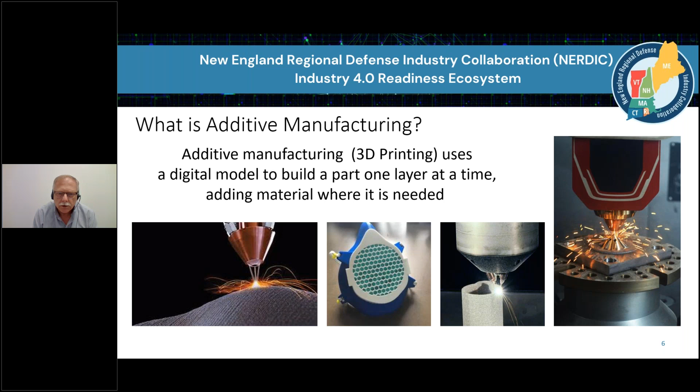Next slide, please. So what are the benefits of that versus other traditional methods? It has the potential to make things better, faster, cheaper, lighter than some of the conventional technologies. Early adopters in the aerospace industry are reporting as much as a 90% reduction in material cost. They're not creating the scrap and waste that they do in some of the traditional processes as far as metals go. With the new tools available for topology optimization and generative design, it's being used to lightweight parts. So in aerospace, electric automotive and many different industries, that's an important feature.

It's great for part consolidation. Instead of multiple parts conventionally, where we're limited on how they can be made, using additive technology we're making parts as a single piece now. The fuel nozzle from GE's LEAP engine is a great example. It was 20 plus parts originally the way it was designed and manufactured. They're building it now additively as a single part.

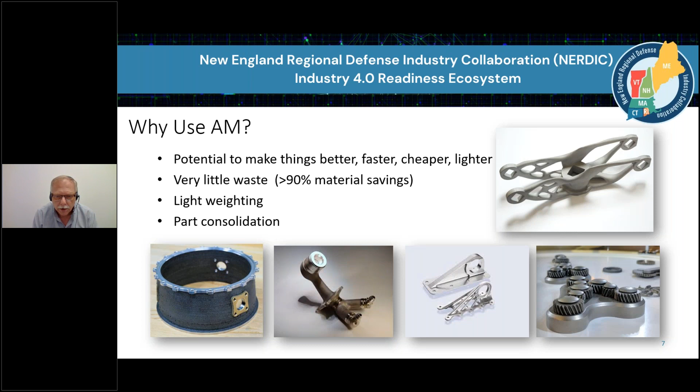Next slide, please. So why use AM? Once again, it can be a tool to create things that are difficult or even impossible to do with other technologies. So if we look on the left, the heat exchanger, you have a helix inside a tube.

This would be impossible to build as a single piece anyway using conventional tools. You can design for end use versus manufacture. So when you design something, hopefully it's designed to be manufactured, and there's limitations on how you can hold it, how you can build it, what you can do inside the mold, et cetera. Using additive technologies helps to free up some of the design constraints that were traditionally met. So the concept of free complexity.

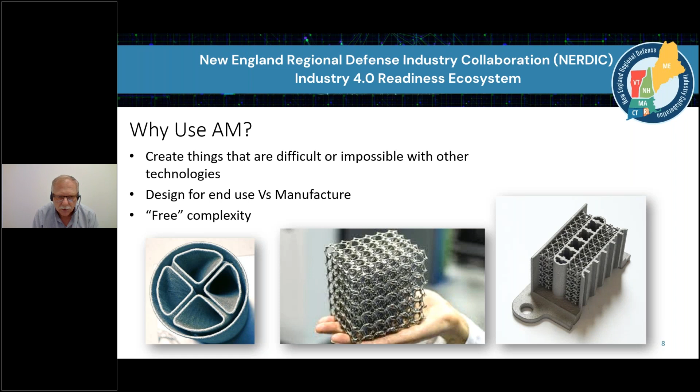So when we look at the matrix in the middle, this is a great example where this would be impossible to build using conventional technologies, but it's really no more hard to build using additive technology than building a solid cube. Next, please. So typically, there's no tooling or fixturing involved. So when you're looking at the low to mid volume production range, if you don't have to have molds or dies made, this can be a tremendous savings. So when we look at the electrical connector on the right, that's made using additive technology, and it has as good characteristics as something that's traditionally injection molded.

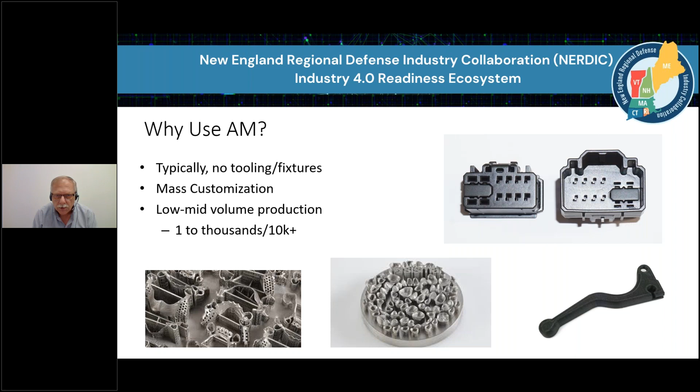The idea of mass customization. So if we look at the tooth inserts in the middle photograph, each one of these is built for a specific patient, and they're all built simultaneously on the same build plate. So the idea of making multiple parts simultaneously, each one different from the others. And once again, it's ideal for low to mid volume production, which could mean one-off, or it could mean thousands or even tens of thousands of a part.

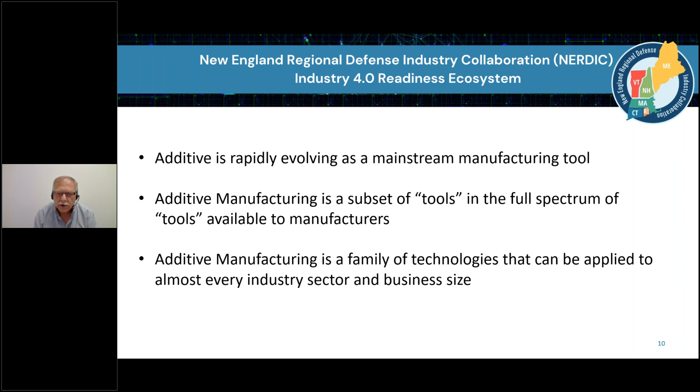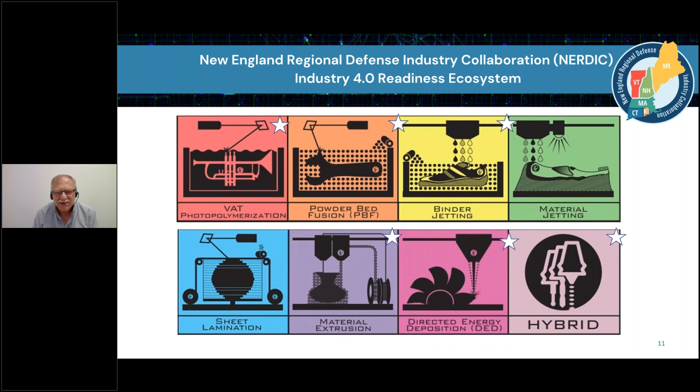So when we look at some of the keys in the additive industry, it is rapidly evolving as a mainstream manufacturing tool. It's a subset of all of the tools that are available to manufacturers today. And additive is not just a single technology or a single piece of equipment, but a family of technologies, and they truly can be and are being applied to almost every industry sector and every business size. The ASTM F42 committee has defined 7 different technology families that comprise additive, plus hybrid. So there's a lot of different technologies available, a lot of different kinds of tools in the tool set. Depending on what you want to do, one or more of these tools may be more appropriate than others. That's outside of the conversation of this presentation.

When you look at the types of materials, basically anything that's made using conventional technologies can more than likely be made using additive technology. So a full range of plastics and polymers, full range of metals, composite materials, ceramics, and even sand, so the digital printing of molds and cores for the casting industry. And key is that new materials are rapidly being developed specifically for the additive process, and in fact, they're being customized for it. So it's getting to the point where you can tell a company that you need a part that has to meet these specifications, and if there's not an existing material, it's possible to custom design a material for that application.

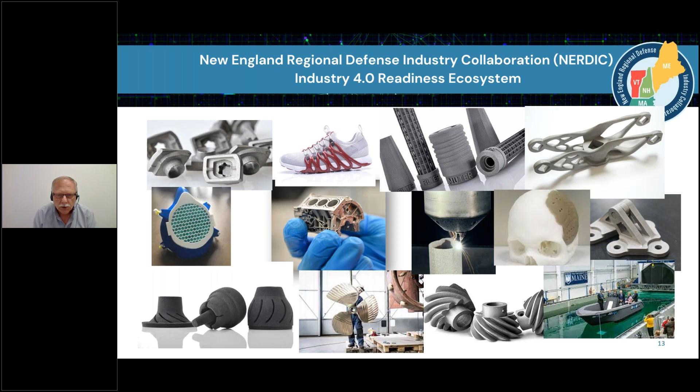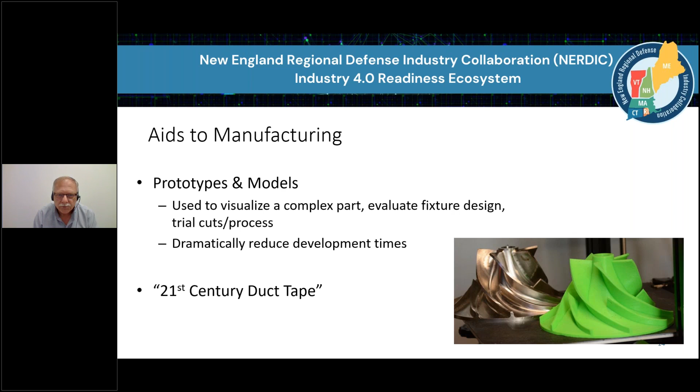So additive is being used in a multitude of industries for producing new parts. This is a wide range of some of the things that are possible. Next slide, please. But what we see as low-hanging fruit, or something that is very commonly used for additive today, is aids to manufacturing. Originally, additive manufacturing was a tremendous tool for prototyping, so it continues to speed up the design process. People are using it to produce models so that they can visualize a complex part, what they need to do to fixture it conventionally, or they can even begin making test cuts and developing their process while they're waiting, as an example, for a casting to come in. And people affectionately are starting to refer to it as 21st century duct tape. There's not much that you can't do with it.

As we continue to talk about aids to manufacturing, the idea of fixtures, jigs, guides, customized tool carriers, customized parts trays for assembly, just a wide range of applications. Once again, with all of the materials that are available, if you can conceive it and you can build it conventionally, then here again, additive might be a great tool. It's freeing up a means for creating fixtures. It's reducing the cost of building those fixtures. It's reducing the time required to build them.

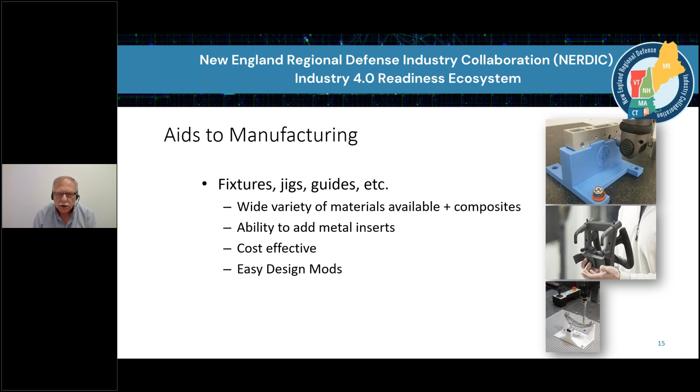And so it's really revolutionizing the use and availability of fixtures. Right, next, please. So the takeaways in quick summary: additive is here to stay.

It's not a flavor of the month. It's a very real manufacturing tool that's moving rapidly into the manufacturing mainstream. It's evolving and it's being adopted at a much faster rate than many companies realize. So if you're not using additive today, it would be an interesting experience for you to realize your competitors and other industries are adopting it and making use of it.

The materials are evolving, and as the materials are evolving, so are the design and the modeling tools. So it truly is enabling and allowing people to build new parts in new ways. Here again, to repeat, it is rapidly becoming a mainstream manufacturing tool. It can work synergistically with traditional technology.

So once again, the idea of additive and traditional subtractive machining, working on a lathe, cutting, grinding, are all technologies that work hand in hand with each other. And it won't completely replace traditional manufacturing tools, but it is going to be highly disruptive. There are a lot of companies that have already adopted it, and a lot of OEMs are investing heavily in it.

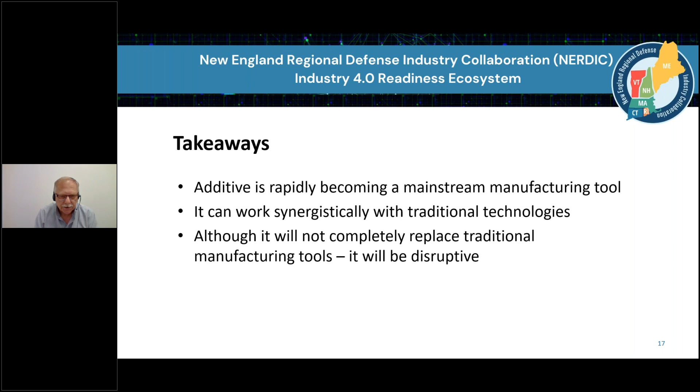Thanks, Jeff. So now we're going to get into some of the case studies. We did two case studies. The first one was with Concepts NREC. And I'm going to invite my colleague, Sam Greenbank, to come on and talk about the actual building process.

Hello. So just to go over this part and what we did with it. We were given a part and tasked with validating how manufacturable the part is using additive technologies, to look at how easy it is to make, can it be made, what kind of things there are to watch out for, how well it meets tolerance, etc. The part is fairly complex. It has internal channels that could not be conventionally manufactured.

We used a Renishaw AM400 powder bed fusion machine to build the part, and we used 316L stainless steel powder for the build. Namely, that's what we have on hand, and it's a good material to work with for validation before using more expensive end-use materials. Total print time was about 36 hours.

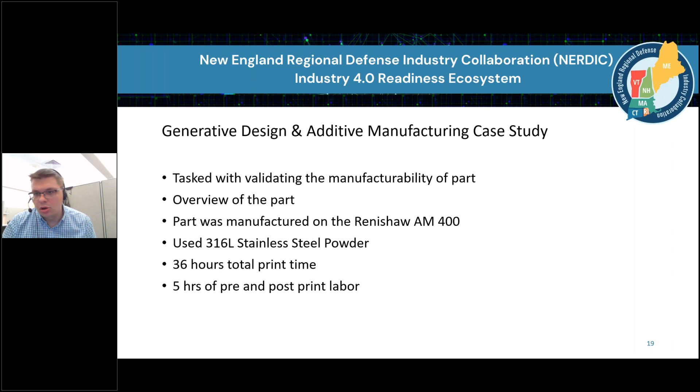So to go over the initial issues that we saw, the part geometry itself posed several challenges. The part had a fairly large area of overhang that would not be in direct contact with the build plate, at a very shallow angle that's prone to lifting and peeling without adequate supports and tie downs.

Several of the internal cavities also had a flat roof, for lack of a better term, that would typically need support material. However, being an internal cavity, supports would not be removable. So that was an area of concern, and part of the reason that we wanted to validate this part first before going much further with it.

As for the strategies I used to print this part, I printed two parts side by side. The first one used traditional pillared support material, basically a bunch of posts on the bottom surface of the part, tying it down to the build plate. My concern was that this would rip free of the supports, and the surface finish of the bottom surface would not be adequate, and there wouldn't be enough material left to post machine.

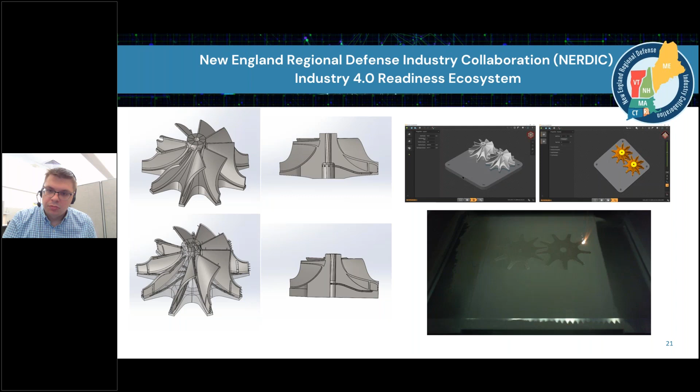On the right-hand side of the screen, we have the setup in the Renishaw software to build the part. First one is the layout with the supports, and then the other one is the toolpath validation. And finally, the bottom picture on the right side is a shot of the machine running to kind of see how the parts were nested together in the powder build. Go to the next, please.

So this is the finished part coming out. Surface finish, and the fact that it completed without any real issues was a bit more than what I personally expected from the part. I expected to have more difficulties than we did have. The build plate did warp significantly and required quite a bit of work to get it out of the machine.

The other issue that we had is the cooling holes that you can see in the center picture. Those are about 0.5 millimeter in diameter on the model. Some of those towards the end collapsed a little bit in size. And so to clean those out, we used a microblaster to open up the holes slightly, which removed any collapsed material from in there, and then that allowed us to remove the powder from inside the blades by using the same microblaster without the blast media to blow air through the cavities to flush the powder out those holes.

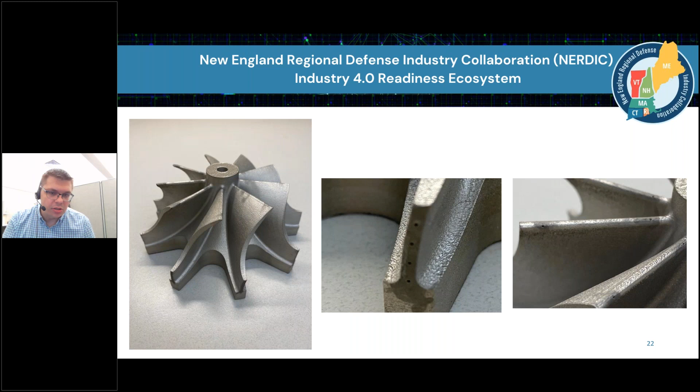And you can also see on the right side the two small holes also on the top of the blades. Again, something that would be quite difficult to manufacture by traditional means. Next slide. So, this is an inspection. I'll turn it back over to Nasir to go over the inspection and the results.

Thanks, Sam. So at this point, we're going to get into the post analysis. We took some scans of the parts so that we can get some dimensional information. What was the distortion as compared to the original CAD design? And then also some CT scans as well, and X-ray images.

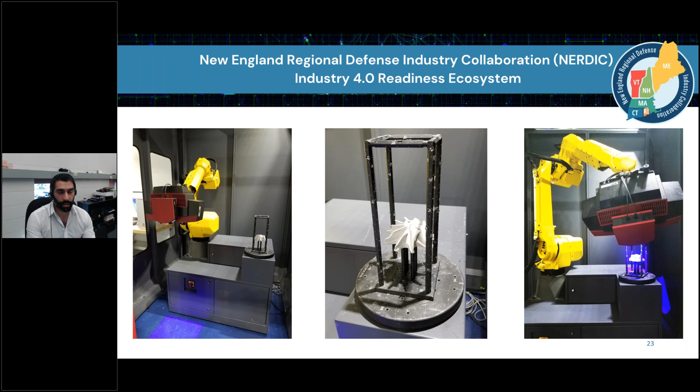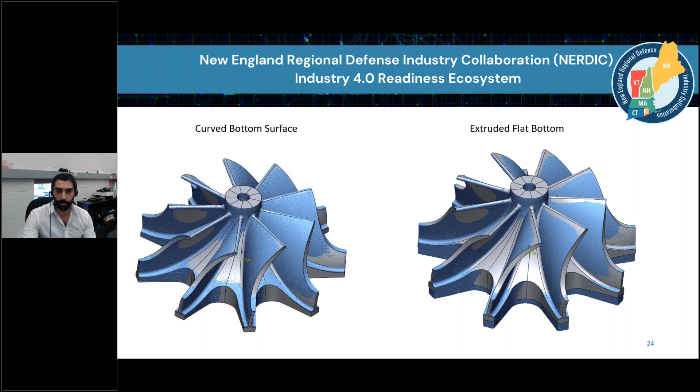So I'm going to intermittently bring on my colleagues to comment, but I'll just go through. I'm going to turn off my video so that it gives you a little bit more real estate to view the slides. Some of the text on there came out a little small, so I'm going to go ahead and turn that off.

Basically, what you saw on the previous slide was the setup on the GOM structured light scanning system. You see on the left there, that red component on the robot is the actual sensor. It uses a structured light pattern to scan the part. With this kind of non-contact inspection system, in the image in the center you see the part is just placed on a few standoffs, within a cage that has a bunch of dots on it, and those dots are called photogrammetry dots. They're used by the scanning system to track the location of that part as it's being moved around, and as the robot is moving the sensor around the part for the alignment of the individual scans.

And so the picture on the right, you see it in action. There's a blue light projected on to the surface of the part. A structured light pattern is projected on, and it deforms as it hits the surface, and cameras take images of that deformed pattern to reconstruct the surface. Next slide, please.

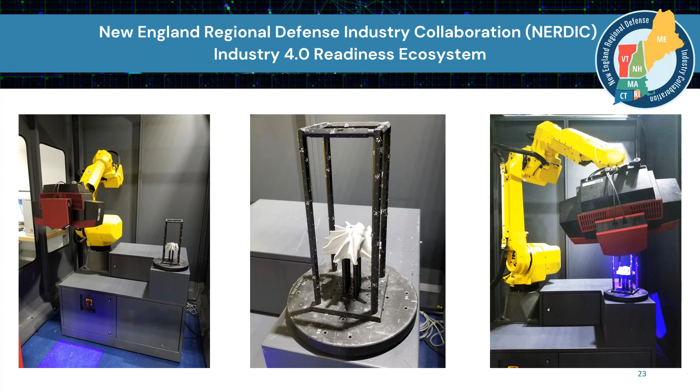Next slide, please. So some quick visuals. If we zoom in on some areas at the top there, that top cylinder feature, you can see that the scan data is below the surface. So we're going to expect to see a negative deviation there.

And on the picture at the bottom left and the bottom right, you can see the respective tips of the impeller blades. You can see the picture on the left where it did not have an extruded flat bottom. Sam mentioned earlier, there was a little bit of warpage of the part right at the tip, and it warped upwards, which pulled the surface that the four cooling holes are on the tip away. So we should see a negative deviation at the bottom, and also a negative deviation on the tips.

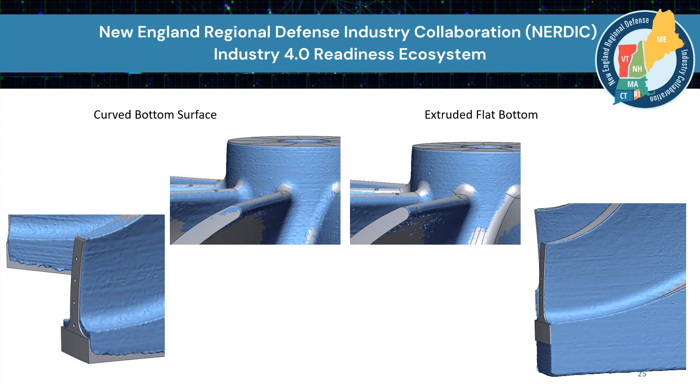So here, what we're looking at, these two images represent a coloration of the difference between the surface of the CAD model and the actual scanned part. The red indicates where the physical part has too much material, and as you get down into the blue, we get into areas of where the actual surface of the part is below the CAD surface.

So what you can see in the image on the left is pretty consistently, we're seeing that the impeller blades have on the suction side a positive deviation. In other words, there's too much material. And then you can see on the left blades, kind of on the bottom surface on the pressure side, there is a negative deviation. So what that's indicating is that the actual surface is more curved than the design in the CAD file.

Similarly, you can see on the deviation map on the left there for the curved bottom surface part, right at the tips, at the base of the tips of the impeller blades, you see red, and that's indicating that the physical part has more material there. In other words, it's curled upwards. And we'll take some measurements there to show you exactly how much that is.

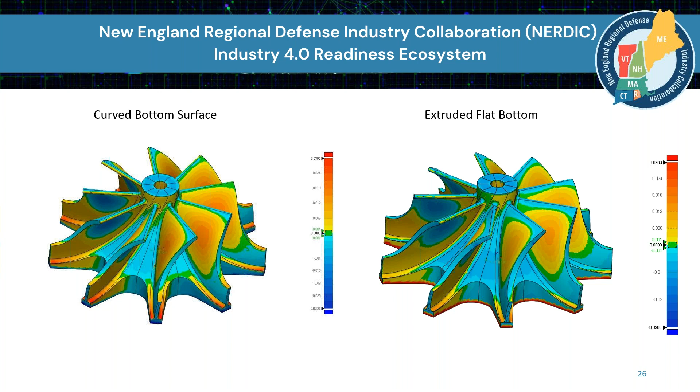Next image, please. So here we're getting into some of the actual measurements. And so we're keeping with comparing the curved bottom surface part with the extruded flat bottom on the right. You can see that the deviation on the curved bottom surface part file was more. So you see that the positive deviation on the suction side of the impeller blade right there in the center is about 17 thousandths, whereas it's about 13 thousandths on the extruded flat bottom part.

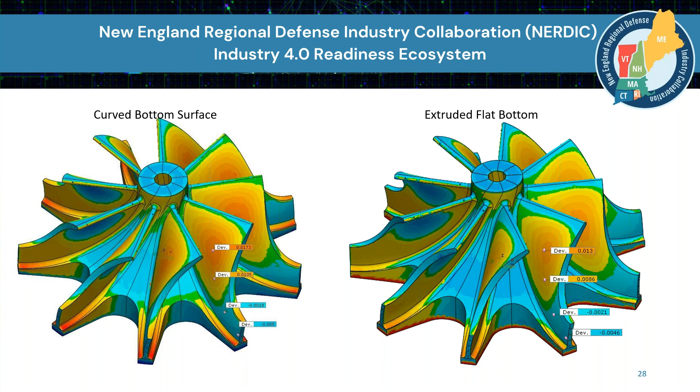If you go further down, you see that the deviation goes to 10 thousandths and then to about 8 thousandths on the flat bottom part. So we're seeing overall less of a curvature deviation on the blade. And then as we get to the end of the tip of the blade there, we're seeing about the same deviation there. So we're seeing about 2 thousandths down to about 5 thousandths. So overall, we're looking at a good 5 thousandths less deviation on the curvature of that blade.

So on the pressure side, again, we're seeing a similar pattern here. We're seeing about 19 thousandths at its most negative deviation on the curved bottom surface. On the extruded flat bottom, we're only seeing 16. So we're about 3 thousandths less in deviation there. And then again, as we go down, we're about 4 thousandths at that next point on the curved bottom surface, as opposed to only 2 thousandths, so about 2 thousandths less.

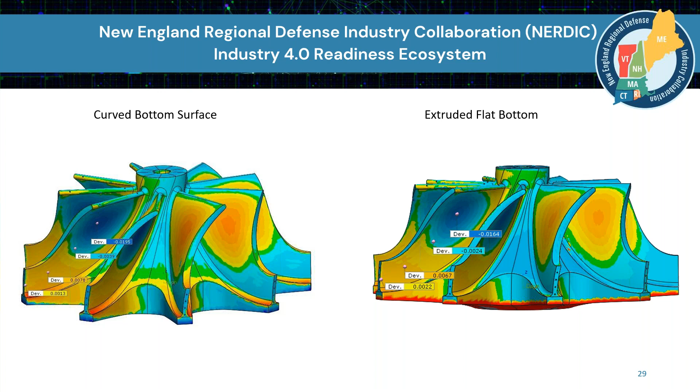So what this is indicating is that, because the deviation is about the same for the pressure and the suction side, the thickness of the blade is maintained, but the overall curvature of that blade is changed. So that's the takeaway here between the first and the second image that we saw.

Next slide, please. So here, right about where the maximum deviation is for that blade, we took a cross section, and we're looking at a whisker plot of the section, and the whisker plot is exaggerated by a multiplication factor. So the physical part isn't this much off. I think I multiplied it by a factor of 10, but the numbers there are indicating the actual value of the deviation. But what this is showing is the consistent thickness and the curvature deviation. So this is indicating an overall warpage of the part.

But the order of magnitude is about 20 thousandths of maximum curvature deviation on the curved bottom surface. On the extruded flat bottom, the average would be about 15 thousandths versus the 20 thousandths that was on the curved bottom surface.

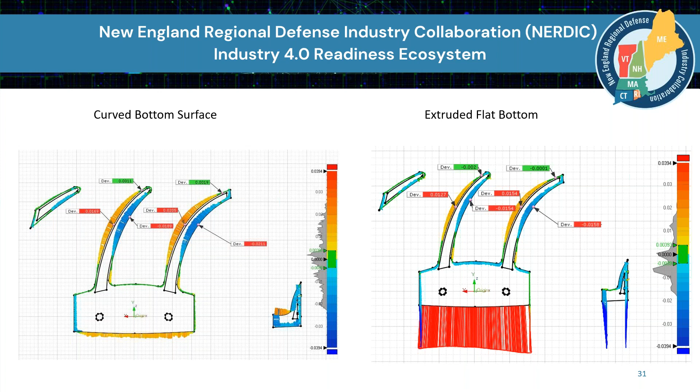The top surface, you can see here, we're actually shorter. There's less material on the part that was designed with the flat bottom part. So we're about 10 thousandths there on the top cylinder face, but only negative 7 thousandths on the curved bottom surface.

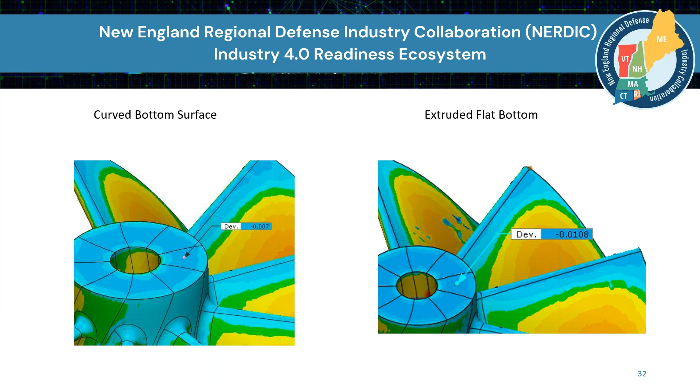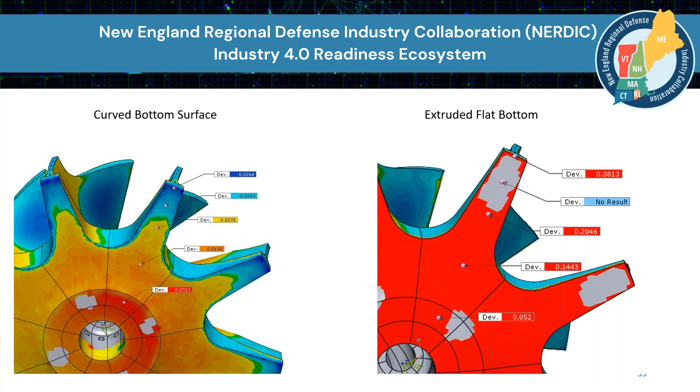So you see that the curvature becomes more exaggerated as you go out to the tip, which probably has overall less material than the bulk that's in the center. The image on the right is not really going to tell us much because we had an extruded flat bottom. So overall, we know that we're going to have a positive deviation there. So by comparison, we're just looking at the left image.

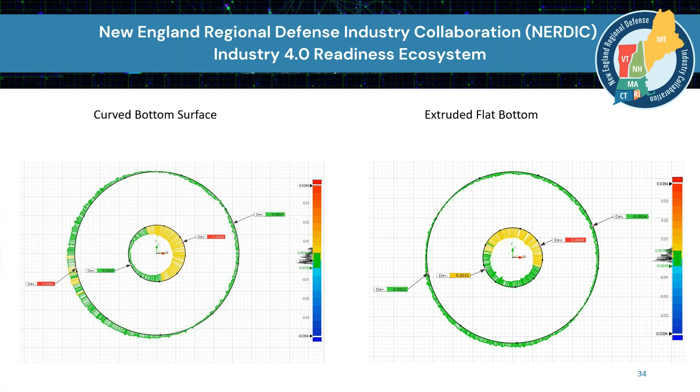But on the extruded flat bottom, the hole is more concentric to the outer cylinder. And it's more of a consistent thickness of that material around that hole. Next slide, please.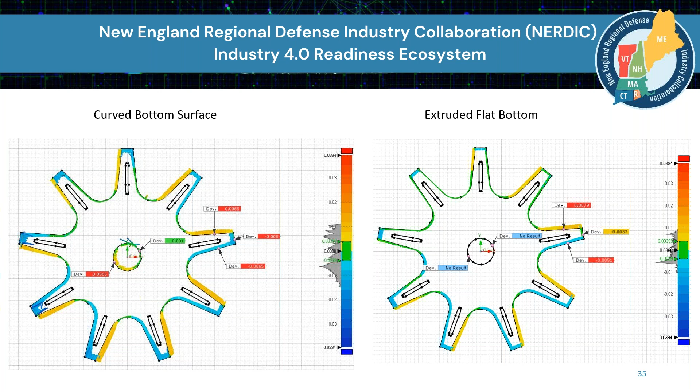This is a cross section of right at the bottom tips of the impeller blades. And again, you can see a pretty large deviation. You can see one of the measurements that were taken on one of the tips there. We have a positive deviation on the top of about 8 thousandths, almost 8.5 thousandths, and we're at just about 8 thousandths there. So similar deviation for the extruded flat bottom. Overall, there's a little bit of a twist in the part. So it's pretty consistent between the two.

So here, this was actually interesting because the file that was printed with the curved bottom, the cone feature of the impeller, is pretty much within plus or minus 2 thousandths of the original CAD design, as opposed to the extruded flat bottom that's out by on average about a negative 7 thousandths. So the cone feature is actually smaller on the print than the original CAD design. What's interesting here is that overall you can see that the part itself is a little bit shorter than the curved bottom's part. So that was an observation that you can see from this section plot here.

Actually, if you go back to the previous slide, Sam or Jeff, if you have any comments about that, I feel like there's a lot more material for the part that was printed in the image on the right, and just wondering if you had any comments about why it would go a little bit short, perhaps some heat, the way it's cooling, or any particular warpage. The only thing that I could comment here is I'm wondering if the best fit is off just a little bit, if the whole part dropped a little bit, and it's thrown off by the lot of excess material on the bottom. That would be one potential guess.

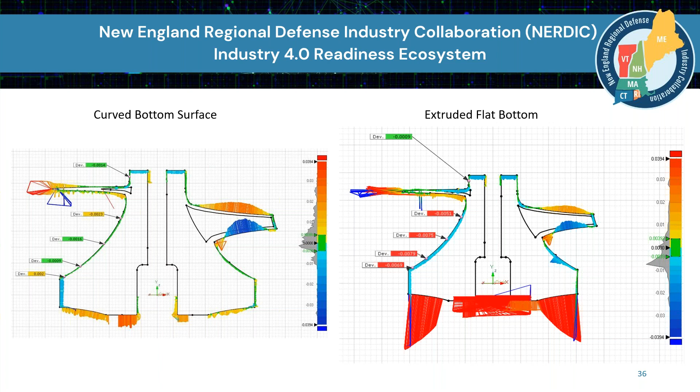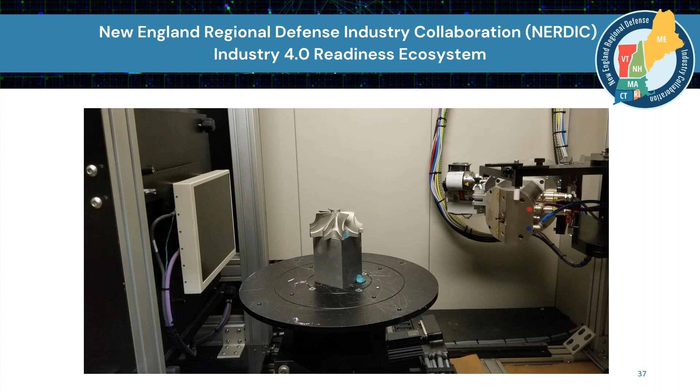We're able to take digital radiography images, so just 2D X-ray images, and we can take some measurements on that. Then we also ran a full CT, which is rotating the part while you're taking thousands of X-ray images, which then go into a reconstruction to come up with a volume scan of that part, and then that gives you more data to do some more analysis on. So you'll see that in the next slide.

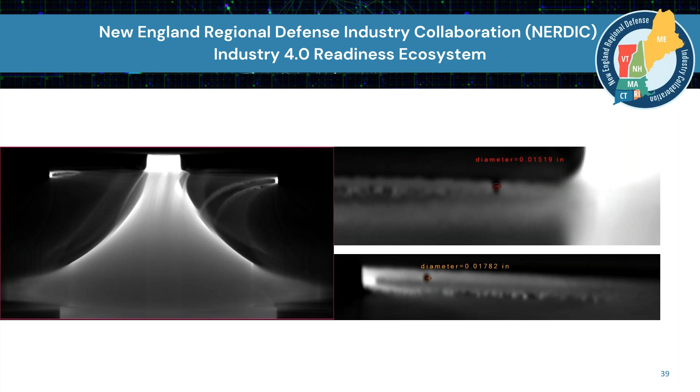And then this is a slice of the CT data. And what we're looking at is the picture on the right is showing the actual measurement of the cooling passages. We're both verifying that the cooling passage is clear, and just a quick check on the diameter of that. Next slide, please.

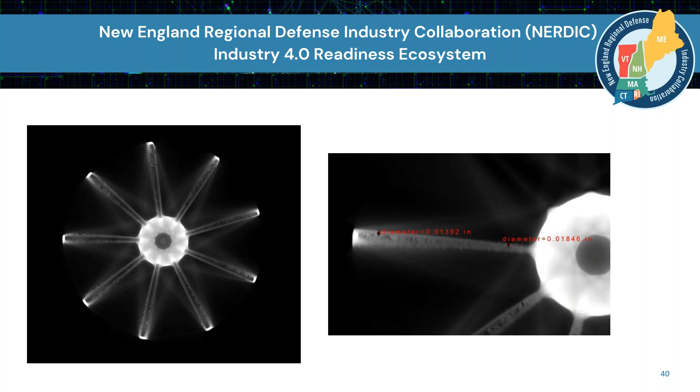Here, you see them on the tops of the impeller blades. You can see that the diameter is slightly different, but within a pretty close, I think it's about 5 thousandths of each other. Next slide, please. And then the wall thickness measurement here that we can take from the CT scan. So again, pretty consistent on the wall thickness as well. Next slide.

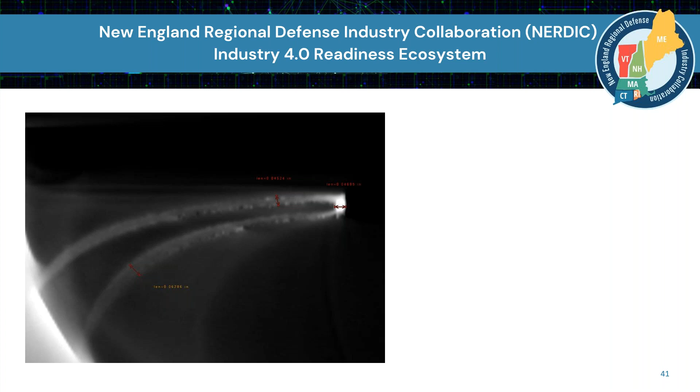Again, so wall thickness measurements on the left. You can see the internal cooling passage that goes into that cavity. I can take a measurement on that. And then the diameters of the tip cooling passages there as well. So pretty consistent in terms of the diameters of these holes.

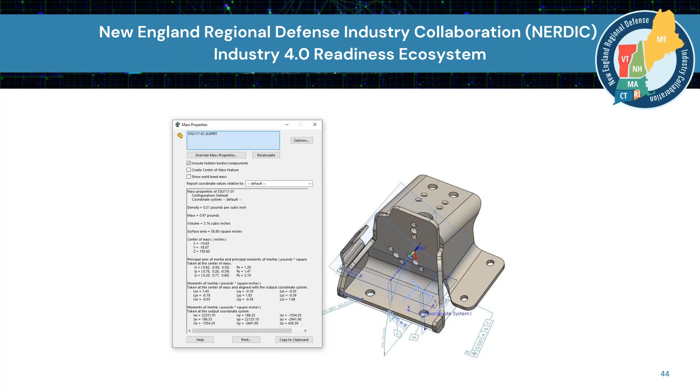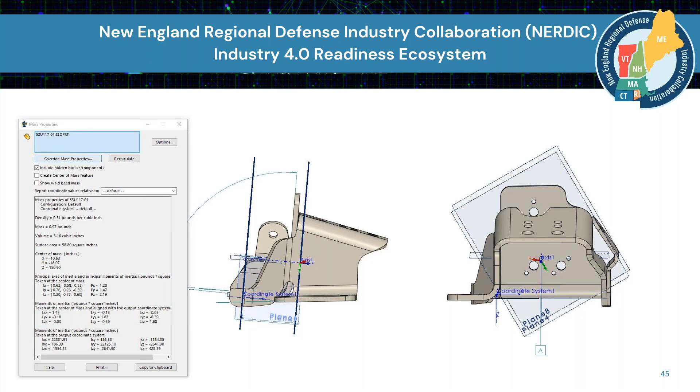Next slide, please. This is a few more screenshots of where that center of mass is located relative to that front right hole that we saw. Next slide, please. So what we're doing now is just generally blocking out the design volume that we're going to present to the generative design software. I want to be able to measure some key features, and I need to be able to get to it. And so the design volume is constraining the space within which the generative design software can create that fixture. So I'm just defining that.

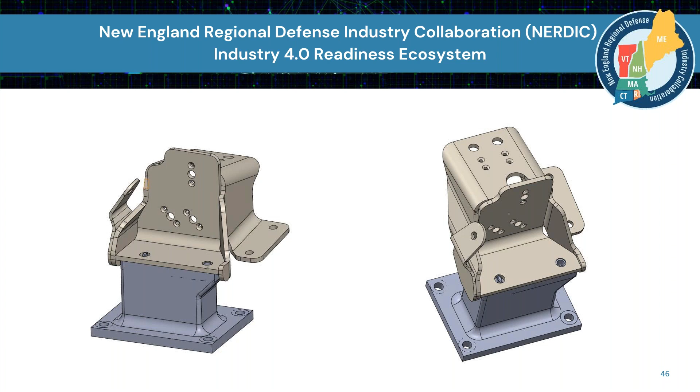The picture on the right, you can see kind of a cylinder feature, which is acting as a pin for the hole on the right. And then the feature on the left hole is a diamond pin type design to constrain it so it doesn't rotate. And then the bottom surface is going to actually mate up against the bottom of that sheet metal part. So you'll see it clearer in the next image here.

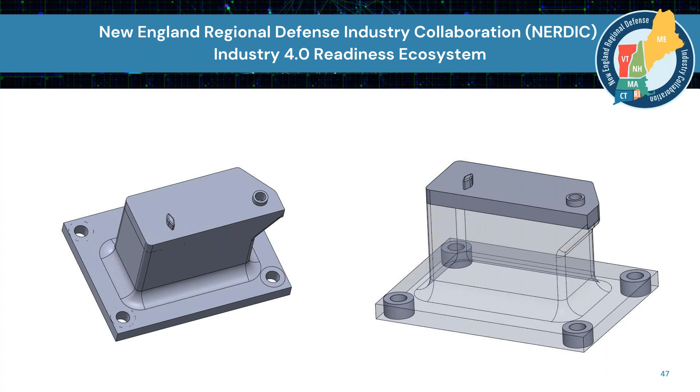But the cylinder feature you see on the top right, that's acting as a gauge, so that hole slips right over that, and then it has a through hole at the top of that, so that we can actually screw in a 1/4-20 screw to hold down the part. And so we're going to put the loading case on that pin there. So now we import that geometry into the generative design software. We're using ParaMatters CogniCAD.

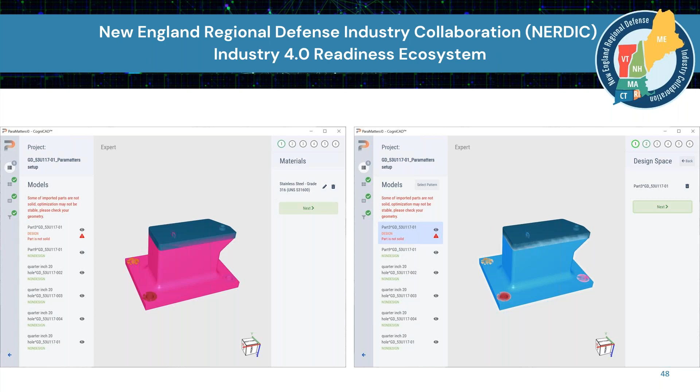And the first thing that we do is we set up, you see the image on the left, our material. I took a screenshot when it said stainless steel, but we actually changed it to composite carbon fiber material later. And then the image on the right is showing the selection of the design space. So the geometry that's highlighted in blue is defining my design space. So I'm telling the software that this is the space within which you can design the fixture. Do not go outside of that, because I'm going to need to access areas of the part. So that's my way of constraining that. So if you hit next, the next slide.

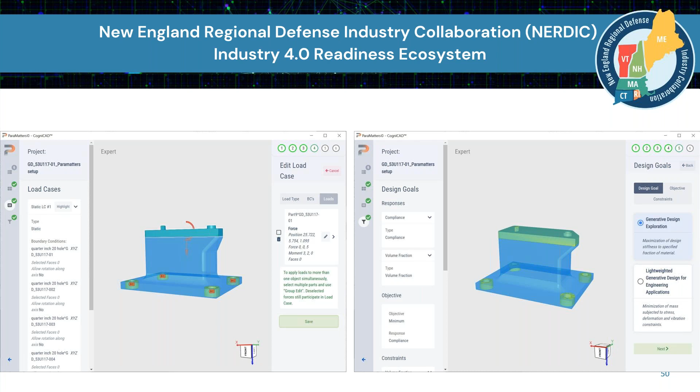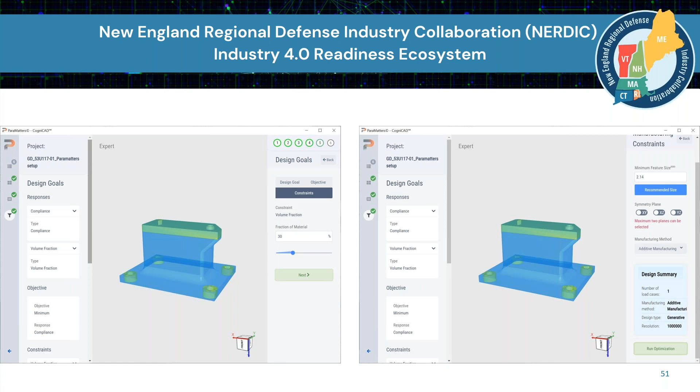And then on the right side, the image is showing what our manufacturing method is going to be. So is it going to be additive? Is it going to be 3-axis machining or 5-axis machining? We can set that up in this software. When we set it up for additive manufacturing, essentially, a lot of the design constraints are released. With 3-axis milling or 5-axis milling, there's more design constraints put on there, and so the design is constrained to be able to actually produce that part. But in this case, we did it with additive.

So next slide, please. And here are the results. So we went ahead and ran that optimization, and this is what the software gave out. So just to let you know, that whole process of some of the screenshots that we went through to set up the generative design software, going from SolidWorks, which I use to interrogate the part, that was about a minute.

I mean, you import the part, you add the material on, and then you do mass properties, and it just gives you the center of mass. And then I could just take the measurement of the center of mass from whatever reference I want to take, which in my case was the bottom right hole on that part, which was datum B. And I calculated all my forces off of that. So that was about 2-3 minutes.

And then once I blocked out the geometry, which was another couple of minutes, I imported all that into Paramatters, went through the dialogues. It's literally just click and next, click and next. So the overall process was 7 minutes and 42 seconds. I wrote it down here. So it was very, very streamlined.

I didn't necessarily have to go through and think about how I want to design everything. I just kind of give it the information, and it comes back with a design that I can just send to the printer. So you can see how it optimized the bottom there. It really reduced a lot of the material. You still see quite a bulk of material.

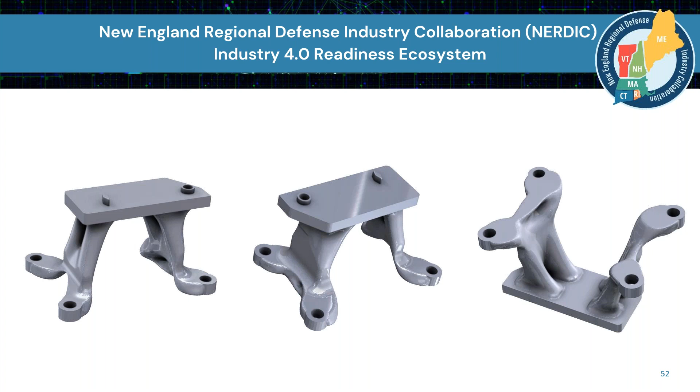If you look at the image on the left, the legs on the right are thicker than the legs on the left. And that's because more of the force is seen on the right, and more of the moment force is towards the back of the part. So if you see the picture on the right where the part is flipped upside down, you can see the bulk of the material is on the back legs, or the back holes that are bolted down to the breadboard. Next slide.

So in the software, for printing, it outputs an STL format. So I could go ahead and just export that out into the printer software. But I did just want to show, in case other formats are needed, the software can surface the file, and it does this totally automatically. It's literally a button click if I want to export it to a STEP file.

You see that it's not like a traditional CAD model where that top face should be just one plane, and then the holes should be just a cylinder cutout. So it's not like I can just hover my mouse over the top plane and that whole plane is selected, but instead it patches the surface. So it fits surfaces to the STL file and then outputs that as a STEP.

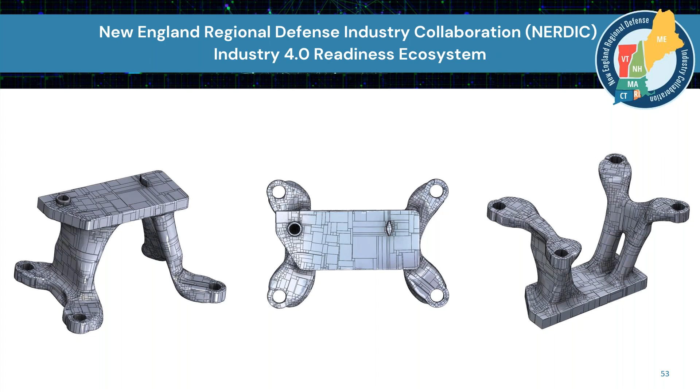What that enables me to do is import that into software that wouldn't take STL or that works with STEP files. But just wanted to point out that this is one of the features of the software. So in our case, we're just outputting the STL file and importing that into our Markforged Eiger software. This is a cloud-based software, so we just upload it online.

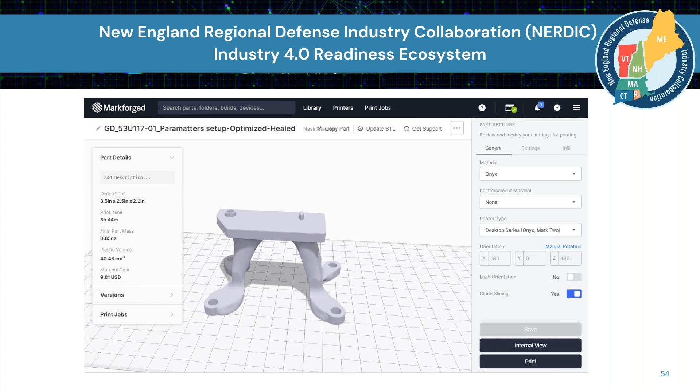And in this screenshot, we're just showing overall part details. You can see that on the left. Print time was about 8 hours and 44 minutes. The cost of the material is like $10. And on the right side there, the dialog, we're using the Markforged Onyx material. There's no reinforcement material, but we could use Kevlar, carbon fiber, I think another material that I'm blanking on.

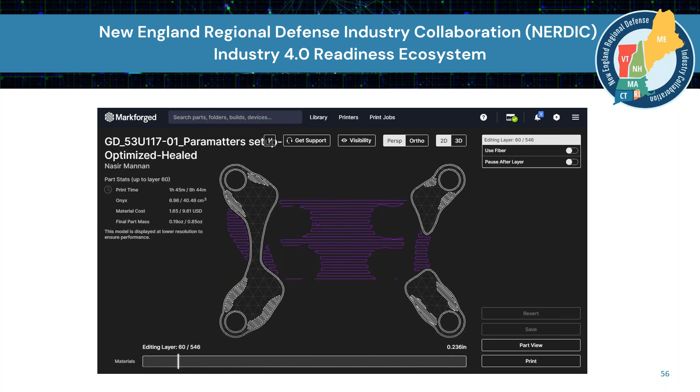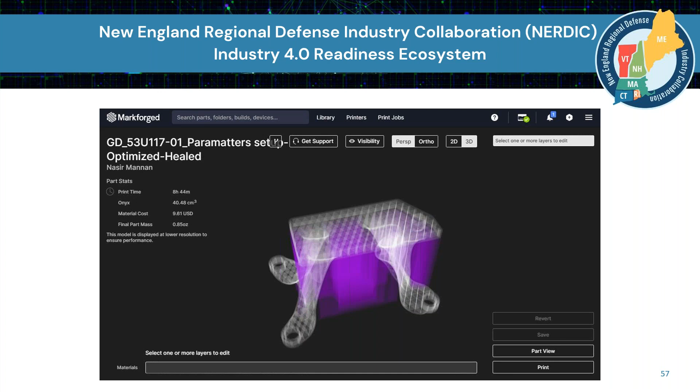Next slide, please. This is a 3D view of everything. So you can see through the part, you can see the structure on the inside of the part and where all the support material is going to go. Next slide.

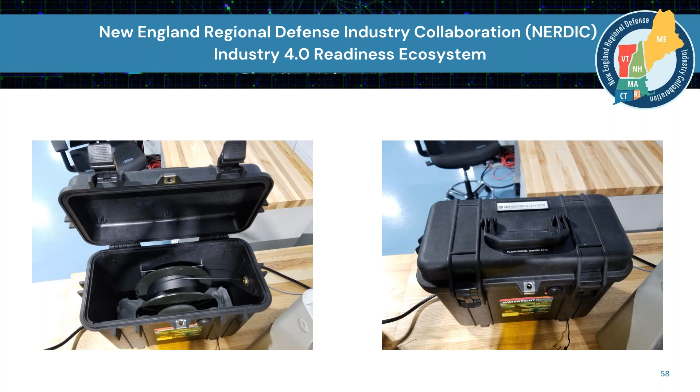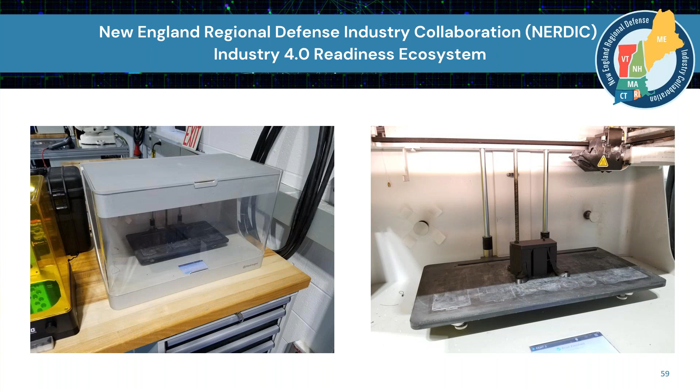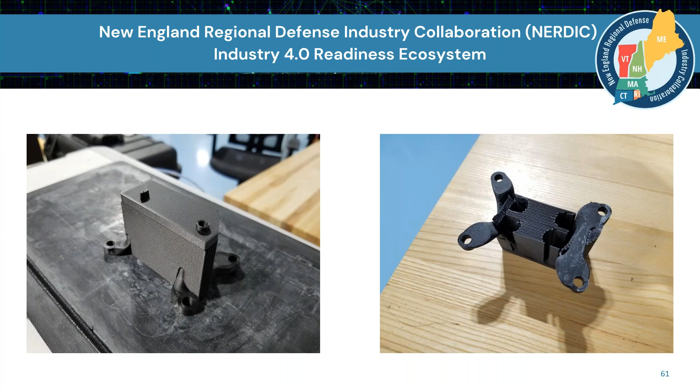And then this is the support structure removed. So in this case, it just peels off pretty easily.

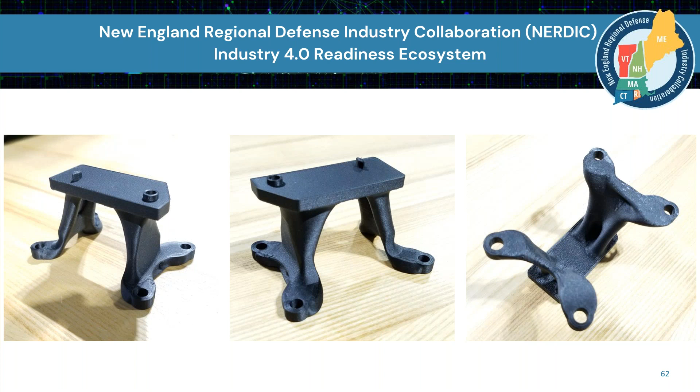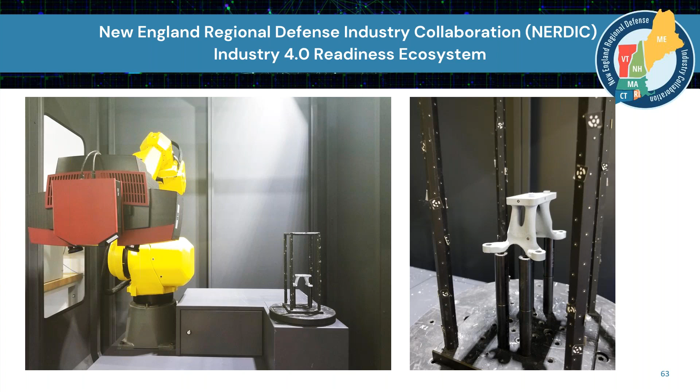I could have flipped the whole part over and printed it on its top, so that the top was touching the build plate. But because that top surface is actually mating up against my datum on the sheet metal part, I wanted that to be as clean as possible. So that's why I had it printed the way that it printed it and having all that extra support material.

I could have probably minimized the support if I printed it upside down. But again, just taking into account the cleanliness of the surface that I need and where I need it. Next slide.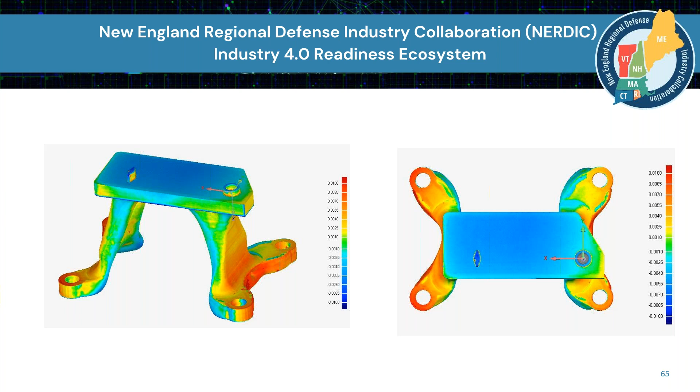Again, a couple other images. You could see the bottom of the part is mostly positive deviation, but that's okay. It overall indicates that because my top surface is negative and my bottom surface is positive, by a little bit of a different amount, it's not that the thickness is consistent. It's a little bit thicker, but it's a little short as well. So just a note there on this particular printer's capability when it's printing up in the Z direction.

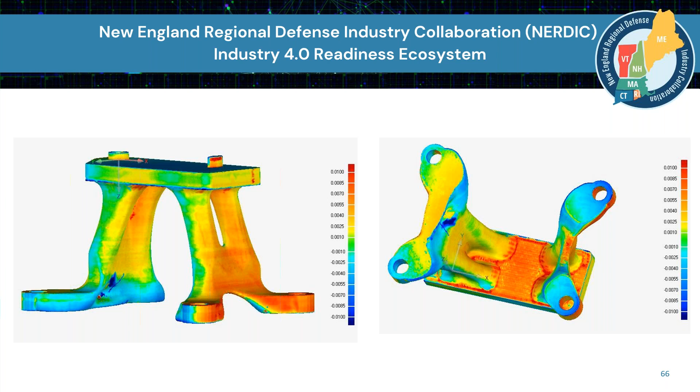Next slide. Okay, so some measurements here. I wanted to make sure that the bottom holes were clear so that we can fit 1/4"-20 screws. And you can see all the dimensions here. So D1, our nominal was 254 thousandths. Our measured value is 251, so just 3 thousandths short. Again, on D2, we're short by almost close to 4.5 thousandths. D3, we're short by about 3. So on average, we're about 3 thousandths short on the hole sizes.

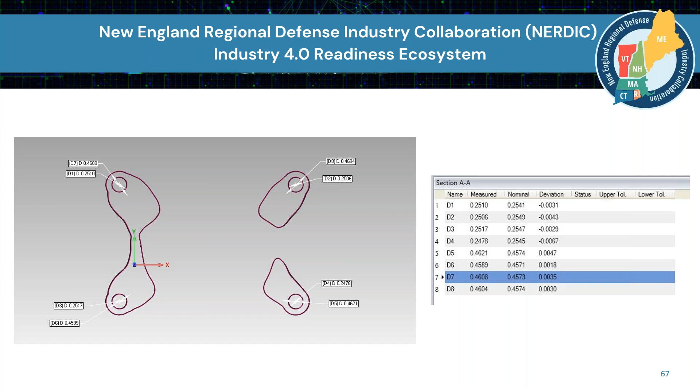On the outer cylinder, we are positive by about 3 thousandths. So the takeaway here for me is that there's about a plus or minus 3 thousandths deviation if I use this particular printer to produce these parts. So what I would do to compensate would be to go ahead and edit critical features to be either +3 or -3, depending on if they're ID or OD. Next slide.

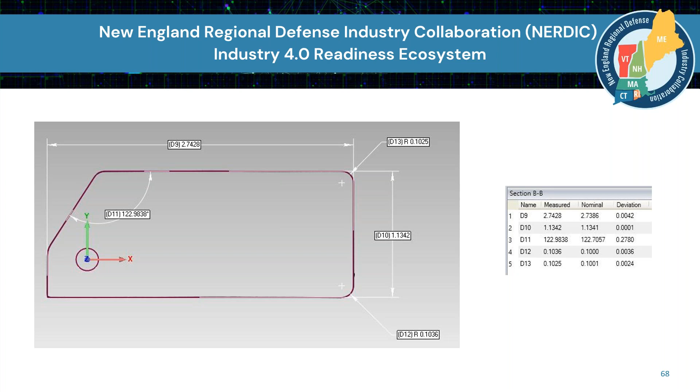Measurements of the top feature here. We're actually pretty consistently at about a positive deviation. D11 is an angle measurement, so that's degrees. We're out by 0.27 degrees. But altogether, on average, we're at about 3 thousandths positive deviation. Next slide. For our cylinder feature on the left, the outer diameter is out by about 2 thousandths, so that wasn't too bad.

And our length measurement on the diamond, we are just short 5 thousandths. It's not positive, which is good, because then it wouldn't fit. And the feature, the cylinder feature that acts as a pin, is +2 thousandths, but you'll see later in the images, the part did still fit on there. It was less of a slip fit, but you can still push the part onto that particular feature.

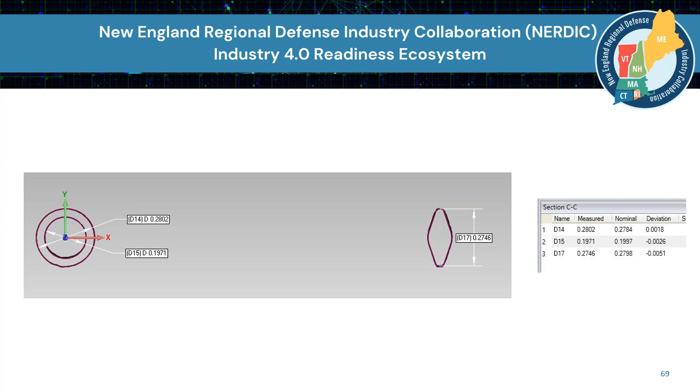Next slide. And then this is just a cross-section deviation of halfway up the legs of the part. So I just wanted to show that on average, we're about 3 thousandths. And it looks like the legs are further out than they're supposed to be. But altogether about 3 thousandths deviation. So it's pretty consistent in that.

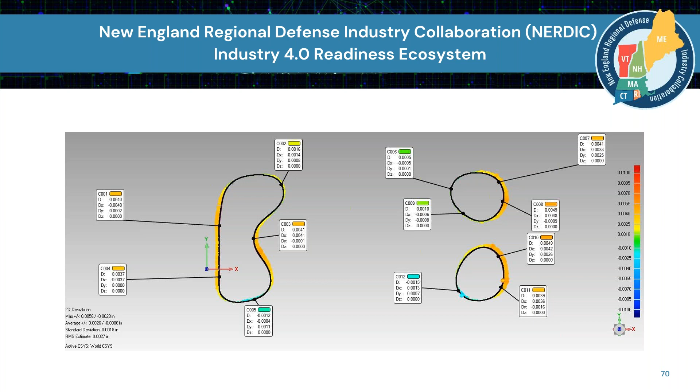Next slide. And here is the part actually on the fixture and being used on the height gauge. So it was stiff enough, and it met the requirement. So for about 7 minutes of work and about 8 hours of print time, the process was fairly automatic. There was not a lot of work that I had to do.

I just had to do the setup, and then I could just walk away, concentrate on other things, and then come back to a printed fixture that I can use to fixture down my part for measurement. So it took away the time that I needed to sit there and manually create that fixture.

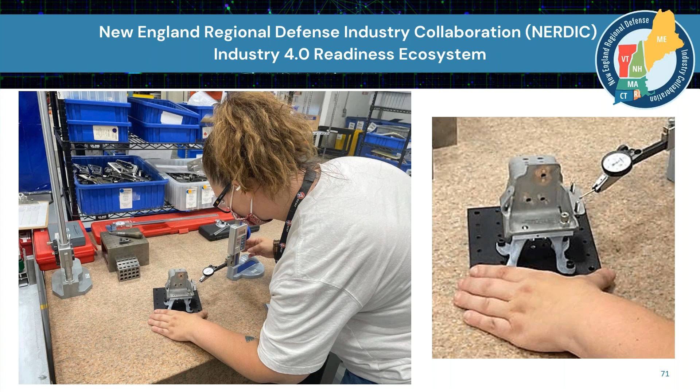At this point, I'll invite Jeff and Sam back on, and we'll go through any questions that folks might have for either of these two use cases. Any comments by Jonathan from Concepts NREC?

Yeah, thank you. This is Jonathan here. Really great presentation and great work. One thing you didn't mention is the timeline you pulled this off. Very short timeline to both build and to inspect that cooled radial turbine. It's pretty important when it comes to product development to not just have a theory, but then to prove it out as you did from a manufacturability perspective.

So yeah, I just want to say great support, well done, and really nice to see not only the work done, but lessons learned, right? It's always successful on a timeline, but we learned a lot about the design we submitted and then the resultant hardware that you produced. So thank you all on this team. Thanks, Jonathan. Yeah, appreciate that. So it looks like we don't have any questions, so we can go ahead and move on to the next slide.